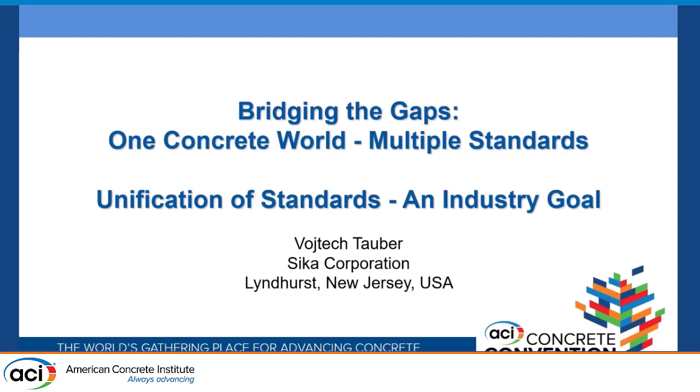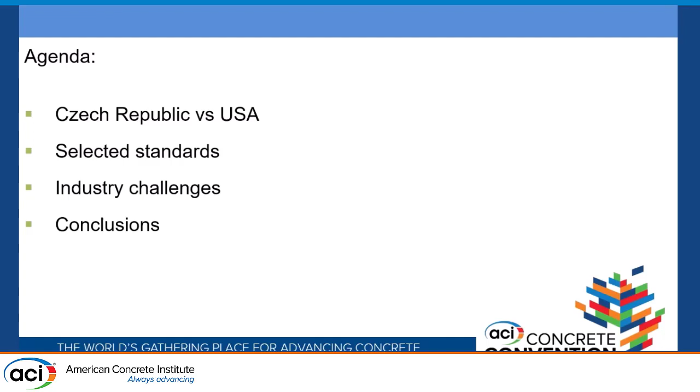In terms of agenda, it's going to be very simple. I have basically 4 main points here. I will share my experiences from the Czech Republic and the USA. I'm going to present and show selected standards. We are going to talk about the industry challenges as well. And we are going to finish with the conclusions.

So on this slide, you can see basically around 2005. This is where I started my professional work. It was directly after the university. I joined Sika Corporation, and I stayed in the Czech Republic for 8 years. So I can say before the transition to the US, I felt pretty confident because in 8 or 9 years I learned a lot within the industry. So it was a great experience.

I moved in 2013 together with my wife to the US, and we started a completely new life. So there are a lot of differences. We had to learn a lot of new things. We had to adjust and adapt ourselves. And it took some time. So I'm going to talk about some work experiences that I had during this transition. And this is what I would like to be focused on.

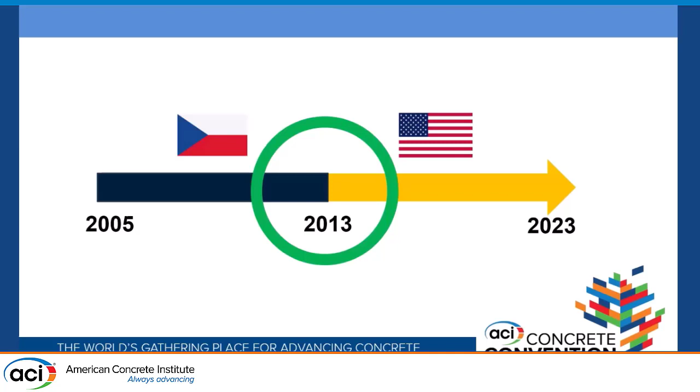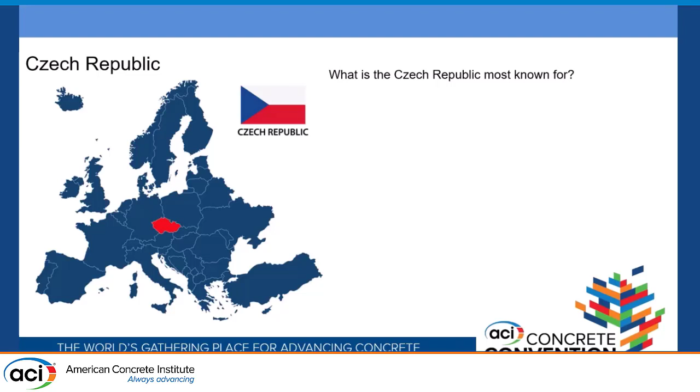Czech Republic. Who knows the Czech Republic? Who went to the Czech Republic? All right, perfect. So the Czech Republic is in the middle of Europe. It's a beautiful country. I tried to Google what the Czech Republic is most known for. So as you can see, there are a lot of beautiful things, and there is one very, very important thing, and that is beer. We have one of the best beers in the world, and we are proud of it.

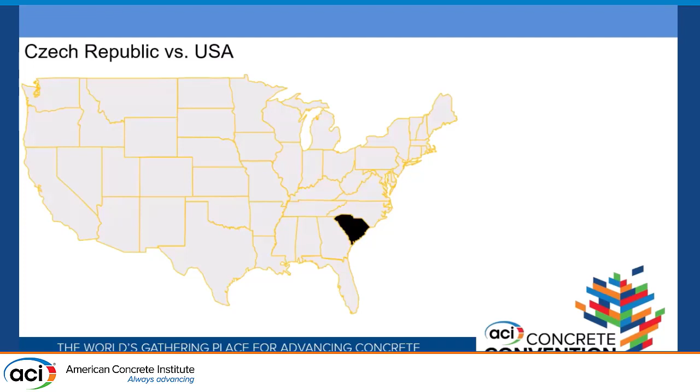In terms of size, you can see on this slide, we are basically 125 times smaller than the US. If you look on the map at all the states, our size is basically equal to South Carolina. In terms of population, the US has more than 330 million, South Carolina 5.5 million, and the Czech Republic 10 million. So this will give you a very nice perspective about the size of the country.

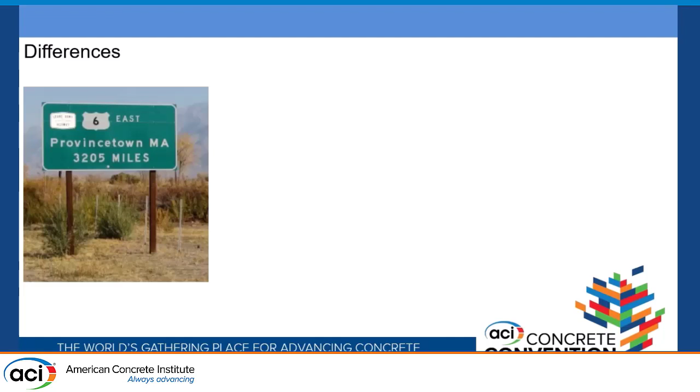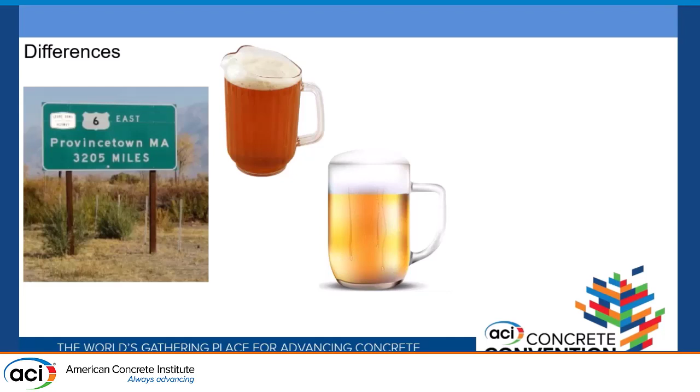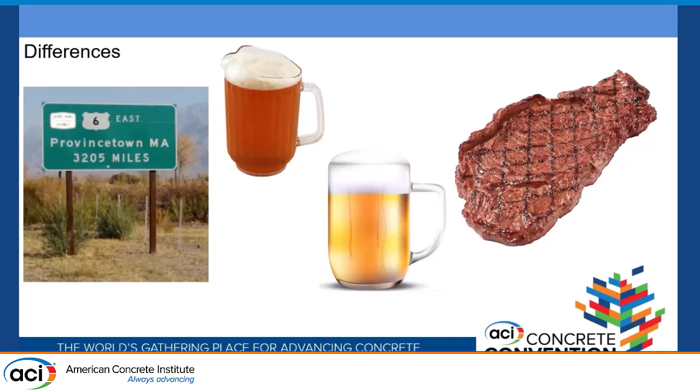Differences. So first thing, when we came here and were driving on the highways, we saw distances not in kilometers, but miles. That was something new, but that's not the biggest challenge. Another thing, beer. In Europe, half liter; in the US, a pitcher with no foam. So okay, something new. We adapted ourselves. Same thing with the steaks. In the Czech Republic or Europe, usually half a kilogram. Here, pounds. So that was something new.

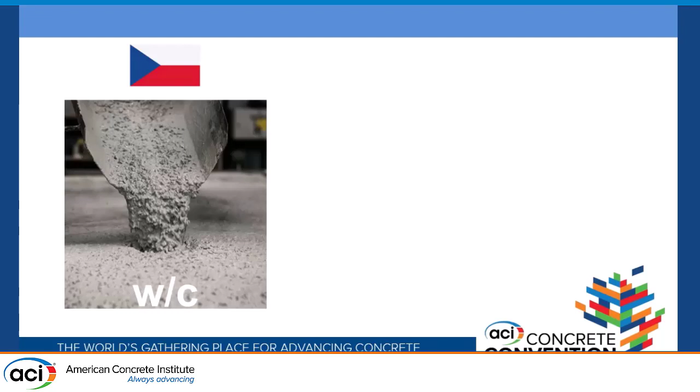Concrete in the Czech Republic. So it's basically concrete, correct? Water-cement ratio, cement, aggregates, water, admixtures, durability, strength, slump. Oscar mentioned that. So in the US, it's the same concrete. The raw materials are slightly different. You are using different cement types, different aggregates, but it's the same material.

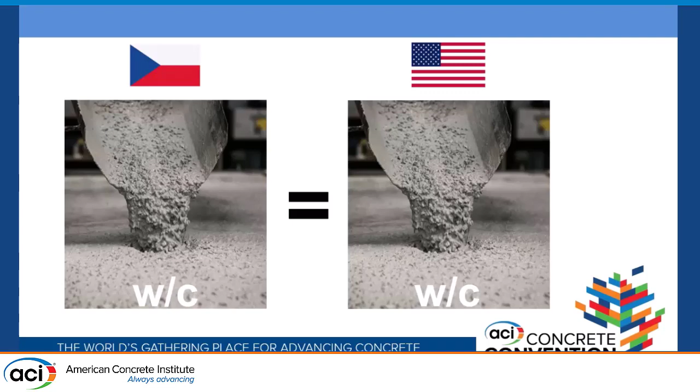Another perspective. In the Czech Republic, there are 450 ready-mix plants. In the US, we have 7,500 ready-mix plants. In the Czech Republic, we have a lot of silos in the ready-mix plant. So we have a lot of options for how we can create concrete, how we can mix cementitious materials, SCMs, together with aggregates. So we can be much more flexible, and we have many more opportunities to create good quality and durable concrete.

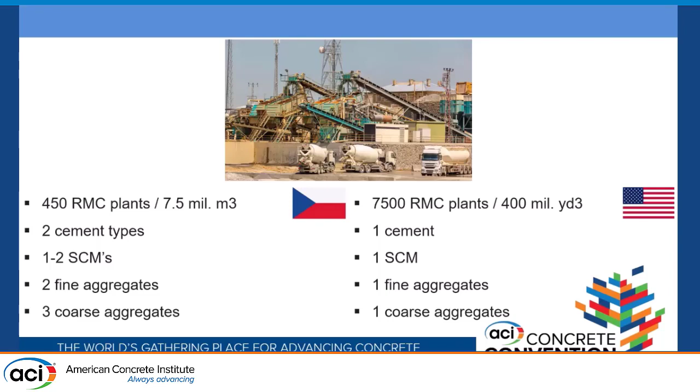In terms of challenges, I think it's globally the same everywhere. All the countries are more or less facing the same or similar challenges. Availability of raw materials, quality of the aggregates. There is a shortage of natural sands. Raw material shortages, issues with durability. I can name a lot of these, but I think more or less we are struggling with the same issues.

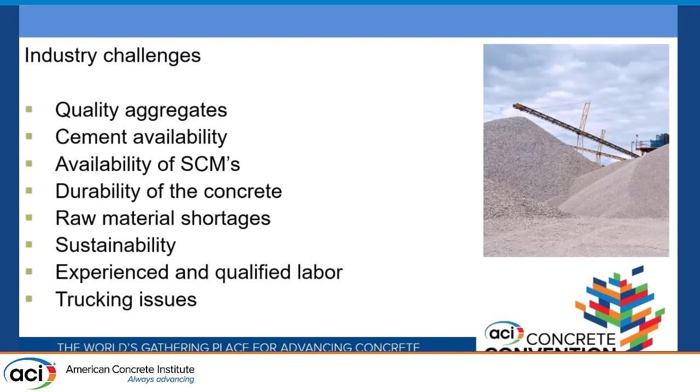Key observations: US, go big or go home. For us, coming from a small country in the middle of Europe, the US is a huge country. Distances, unbelievable. So it was a big learning point.

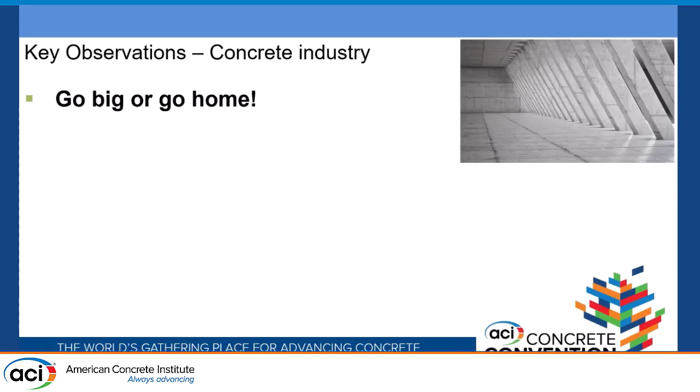Production volume, another important thing. In Czech Republic, an average ready-mix plant is, let's say, 20,000 cubic meters of concrete. Here, it's unbelievable. The projects, Amazon centers, the slabs, again, huge, unbelievable. Mix design, a lot of differences. Selection of the raw materials, again, a lot of differences.

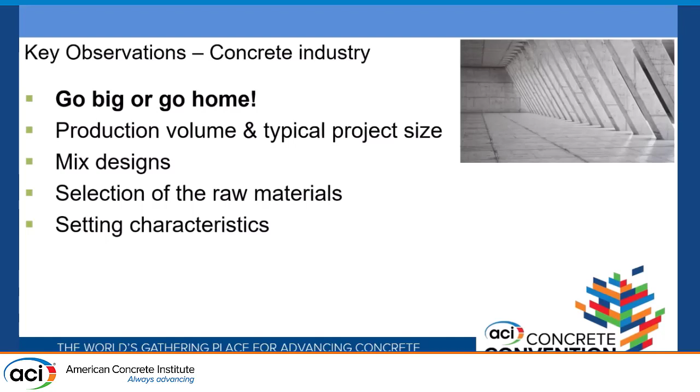Setting characteristics. This is something completely new, or it was something completely new in Europe. Nobody is really checking deeply the setting characteristics of the concrete. It's a very, very important thing. Durability of the concrete. I think the US is much more durability driven. There is a lot of use of corrosion inhibitors, shrinkage reducing admixtures, a push to reduce the water cement ratios. So I think this is again significantly different.

What I really like is cooperation between the industry associations. I was part of NCMA and ICPI, and I was a member of the technical committee. And what we are doing here also with the ACI and ASTM, it's great. The way that industry is working together.

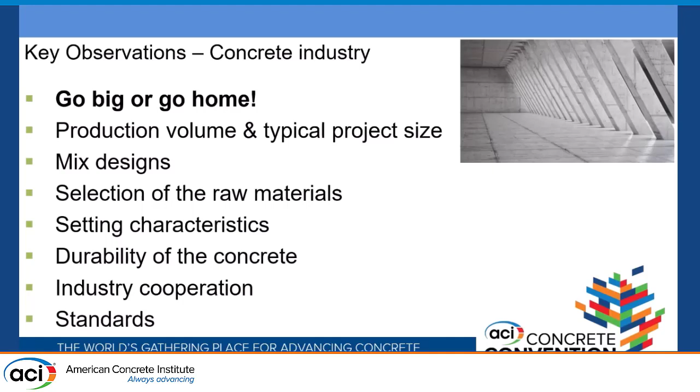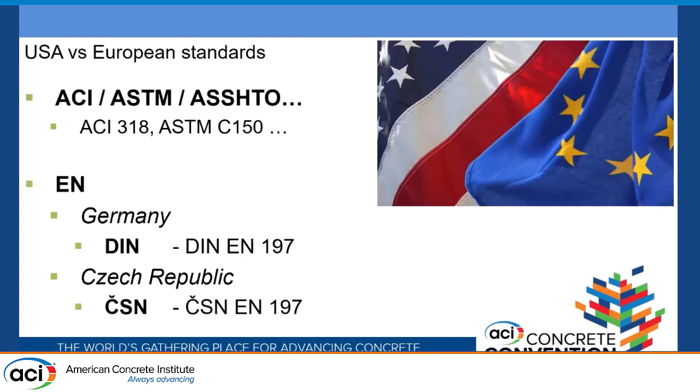In terms of standards, as I mentioned, we have ASTMs, ACIs, and so on. In Europe, it's EN, European standard. If this is a German standard, there's DIN in front of the standard. That's the identification of the country. In Czech Republic, we have ČSN, which is Czech standard. I'm gonna talk now about a few of them.

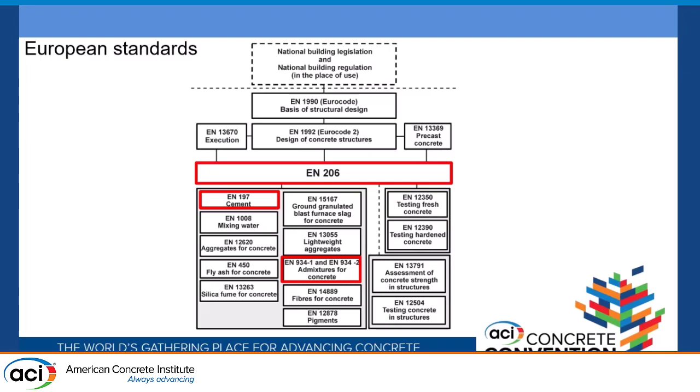So the main standard is EN 206, and as you can see, there are a lot of different standards below this norm. So I would like to focus on two of them, the cement and also admixtures. So if we go back to Czech Republic, small country, 5 cement plants, you can see the types of cement that we have from CEM 1 to CEM 5. We have 5 cement plants. The overall production is 4.5 million tons of cement per year. And in those 5 cement plants, we can create 27 different types of cements. 27. Okay, so this is unbelievable.

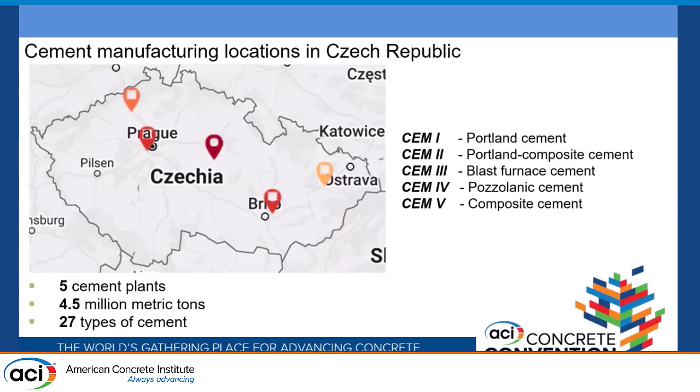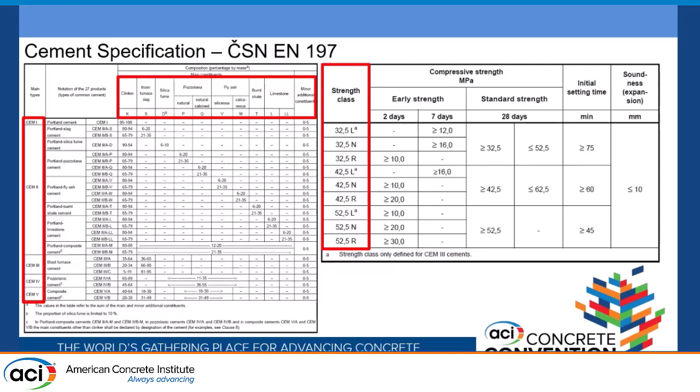What is also interesting in Czech Republic, we have 3 strength types of cement. So it's 32.5, that's compressive strength after 28 days. We have 42.5, and 52.5. So based on the requirements of the concrete, if you are looking for low-strength concrete, let's say 3,000 psi, you are going to use the lower strength class to meet the requirements. If you are looking for 10, 15,000 psi concrete, you are going to use a higher strength class of the cement to meet the requirements of the concrete.

Till 2008, we had CEM 1 42.5 R, R is like rapid. So that was 95% of the cement. And as you can see on this slide, it was 95 to 100% of the clinker. So this is cement that was used for, let's say, durable concrete, 0.45 water cement ratio and below.

Another cement type that was widely present in Czech Republic was CEM 2 A-S 32.5 N. N means normal strength. And that was 80 to 94% of the clinker and 6 to 20% of the slag. So this cement was typical for low strength concrete without special durability requirements.

So what happened after 2010, in 2010 we started to switch the country to limestone cements. And you can see how the contents of the clinker switched. So we went from 95 to 100% of the clinker to 80 to 94 for the CEM 1A, and with the other cement we went from 80 to 94% of the clinker to 65 to 79. So there is a huge reduction of clinker in this.

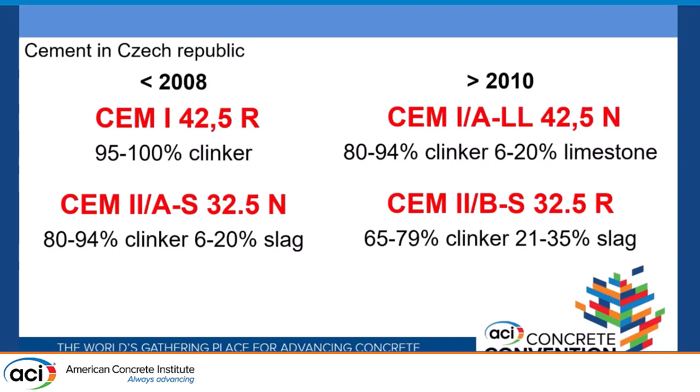And there were a lot of challenges basically linked with the switch. It wasn't like you were going to switch cement 1 to 1 and everything was going to be beautiful. We worked together on this as an industry, between the cement producers, aggregate producers, admixture producers, and we adjusted ourselves, our products, and our approaches to make sure we continue to produce good quality and durable concrete.

If you look at this list of challenges, I think we are now in the US at the end of this transition from type 1,2 to 1L cement, and we went through very similar challenges. There is a lot of learning, as Oscar mentioned, and a lot of correlation, and if we work on those things together as an industry around the globe, I think it's going to help us be better.

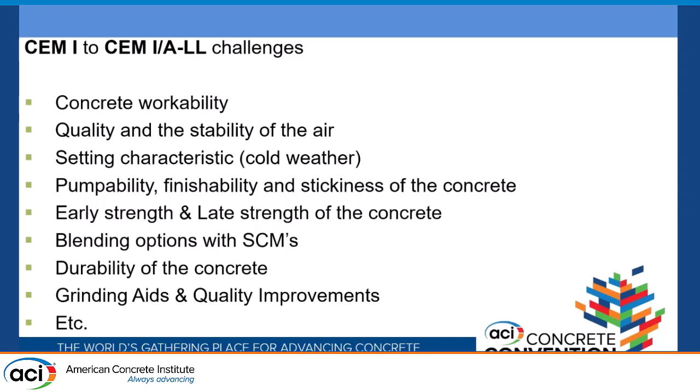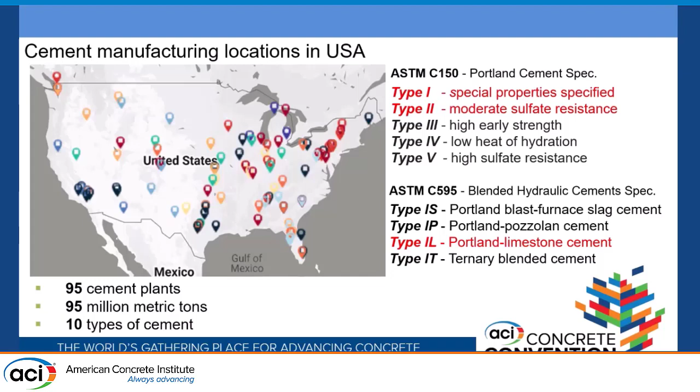Now we are going to leave the cement industry, and I would like to talk a little bit about the specification of concrete in Czech Republic and Europe in general. This is basically the specification of concrete in Europe. It's very simple.

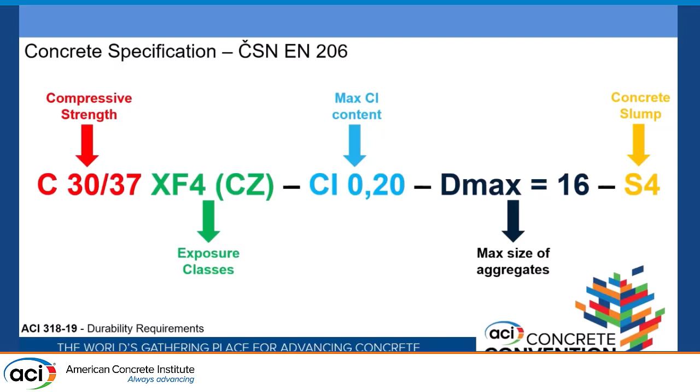C30 to 37 compressive strength. XF4 exposure class, I'm going to talk about this a little bit later. Cl is maximum chloride content. Dmax is the maximum size of the aggregates in millimeters, and S4 is basically for the concrete slump. So let's talk about the compressive strength.

So compressive strength is basically divided - if we talk about C35-45, the first number means minimum characteristic compressive strength on the cylinders, and 45 is basically on the cubes. So that's another difference: in Europe all the strength is done on cubes, here on cylinders.

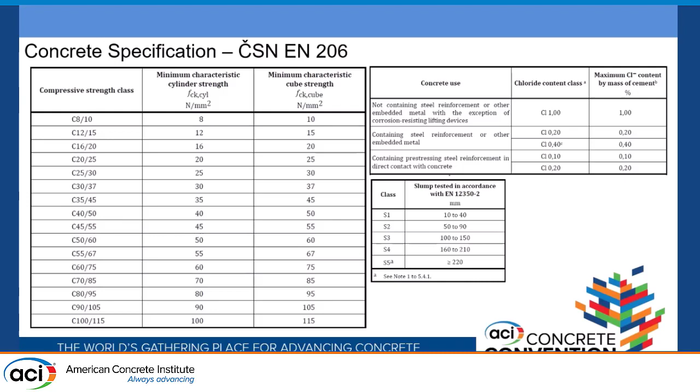Chloride content, very easy thing - there is a specific number that you have to meet for the concrete. Same for the slump. Now if we talk about the exposure classes...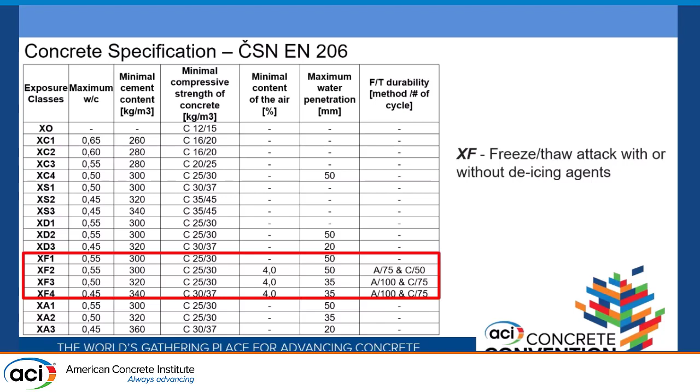So DIN 1048 is one of the methods that I really like, and it was absolutely common in Europe. It's basically tested on cubes. You put concrete cubes, after 28 days, into a special device, and from the bottom there is water pressure for 3 days. At the end of this test, you break the cubes in half, and you see what the penetration of the water is.

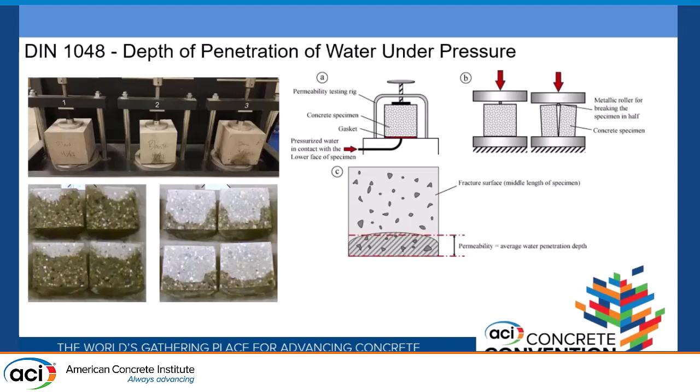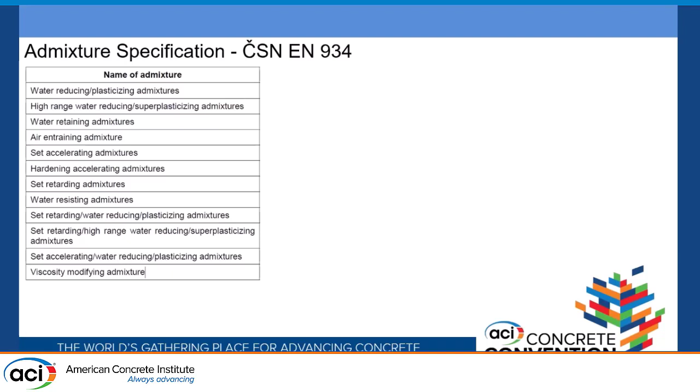If we look at water reducing admixtures - if you want to test a water reducer and have the product approved according to EN 934, you have to do tests in the concrete. Everything is tested at equal consistency, and there are 3 parameters that you have to meet to basically be approved according to this standard.

It's basically water reduction, so you have to have 5% and higher water reduction. You have to meet the compressive strength after 28 days, which should be higher than 110%. And the last parameter you have to meet is to have air below 2%. So those are very simple parameters that you have to meet to have the admixture certified, and you can start to offer this product to the industry.

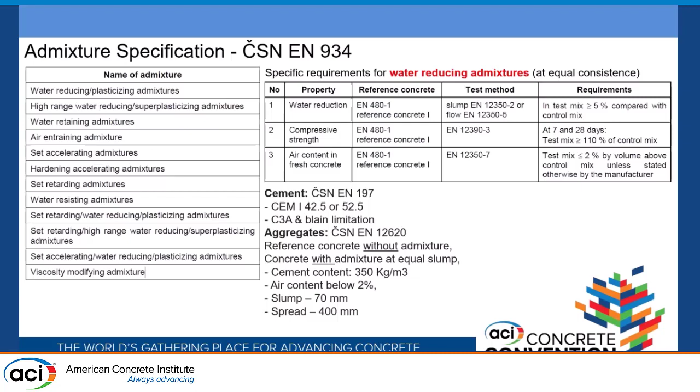If we look at ASTM C494, this is basically the US standard for the same thing. You can see the admixtures are designated from type A to type S. So for specific products, for specific types of admixture, we have a different designation. On the left side you can see what the criteria are. There's additional things we have to measure - setting times, durability of the concrete, flexural strength.

One thing I would like to point out: if you want this product approved according to C494, you have to wait for 1 year compressive strength. So if you compare the European approach with 28 days and the US approach with 1 year, there's a lot of dynamic within the industry - sometimes you have to develop the admixture quickly and sell this product to customers quickly. In 1 year, a lot of things can happen, a lot of things can change. So in my opinion we are losing a little bit of flexibility. On the other hand, this is much more detailed testing.

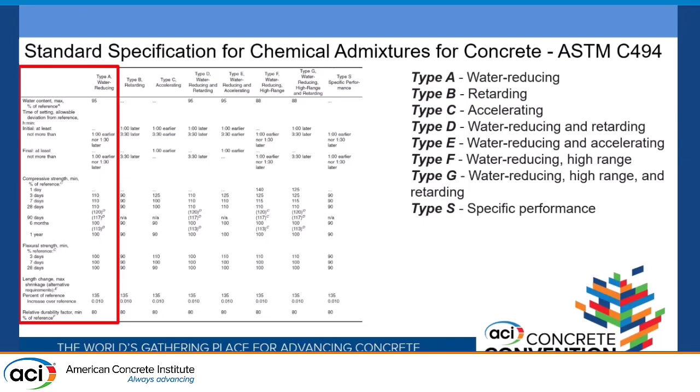We are basically testing durability, freeze-thaw durability, shrinkage. So it's much more detailed, and if there is something detailed, it's going to take some time. So I think we have to think about the balance between the time and the number of tests necessary to perform this type of testing.

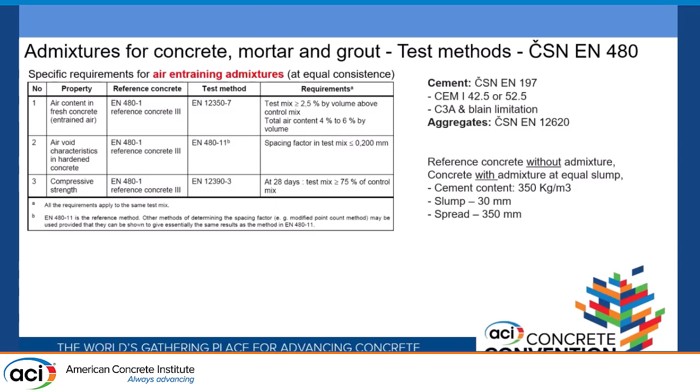Another example is air entraining admixture. You can see here 3 different criteria that you have to meet in the European norm. If we talk about the US, it's basically ASTM C260. Again it's done after 28 days, but you have to do freeze-thaw durability, shrinkage. So this could take up to, let's say, 3 to 6 months.

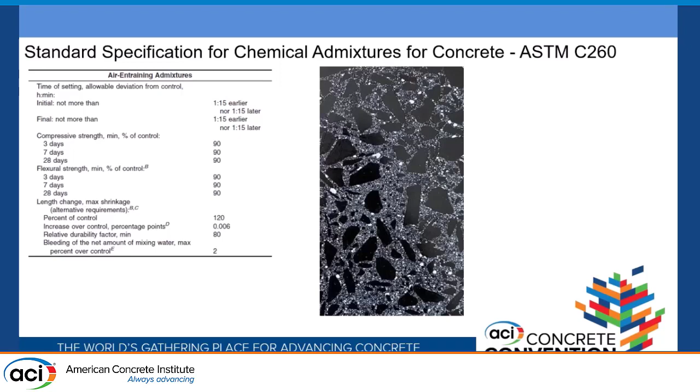So in summary, and this is related just to admixtures: in Czech Republic, if you want to test the admixture in Europe, there's no need to use a specific laboratory - you can go wherever you want. In the US, if you want to do that, there are 2 selected labs that test all the admixtures, so there are some time limitations with that.

More or less, all the testing is completed after 28 days. There are no requirements for specific slump, for specific mix design - you can use whatever you want, unless you have to prove that you're meeting very simple requirements. No limitations in terms of air content, and basically no durability testing, which again, as I said, we need to find the balance between the time and those durability testings.

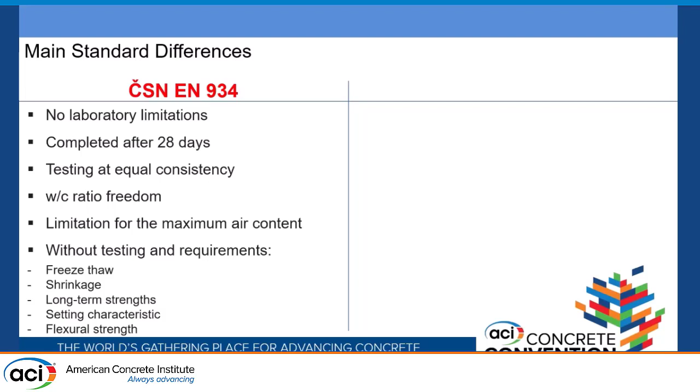So if we look at ASTM C494 and C260, it's very clear that the complexity of the testing, and also the standard, is pretty well done. It's very well set up, but it's going to take a long time. There are various test methods in the standard that you have to go through to make sure the admixture is meeting all the requirements.

In terms of durability testing, as I said, this is much more strict. You have to test compressive strength, also flexural strength, and all the requirements in terms of plastic and hardened concrete properties are much more strict.

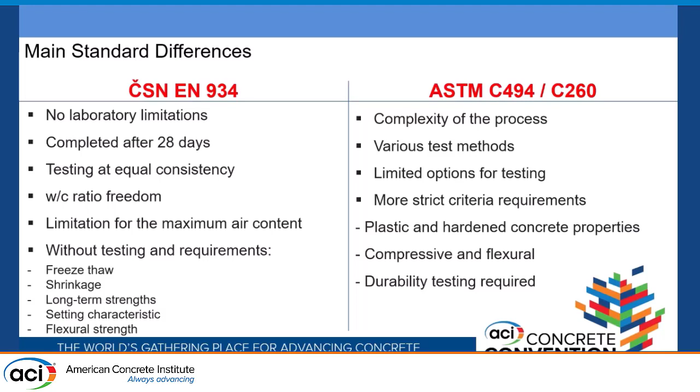So in summary, I mentioned a lot of different things during the presentation, and I think it's important to cooperate together. Our goal is to produce good quality concrete, durable concrete, concrete that is sustainable and going to last a long time. There's a lot of movement within the concrete industry, and we have to be flexible and adjust our approaches.

Again, from the example from Oscar, you can see the differences between the 3 countries that are part of North America, then we have Europe, Asia. Again, the concrete is still concrete. So I think we are going back to what Julitsa said at the beginning - one concrete world. We have to work together.